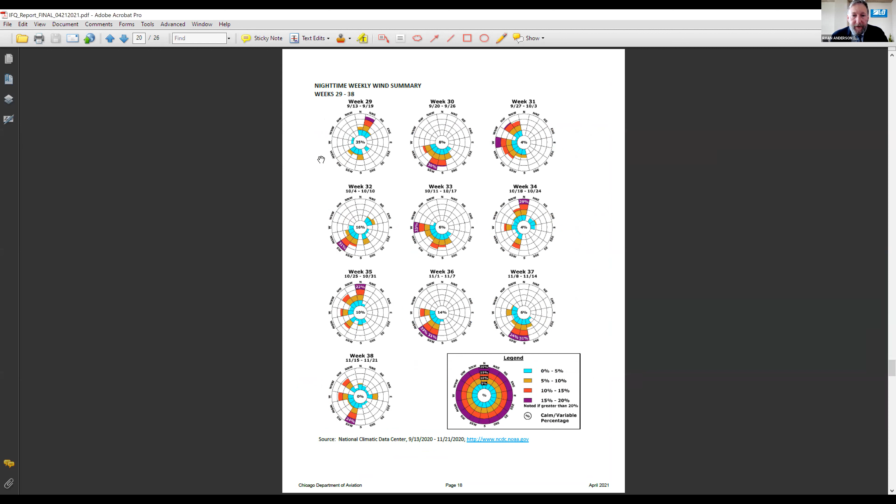the 48-week period. Starting on page 16 is that week-to-week wind rose summary, so you can go through and see what the winds were occurring on each week of IFQ throughout the 48-week period. Page 20 is our runways report for the entire IFQ period for Fly Quiet mode. So you'll see the utilization of runway percentages, as well as the average nightly departures and arrivals.

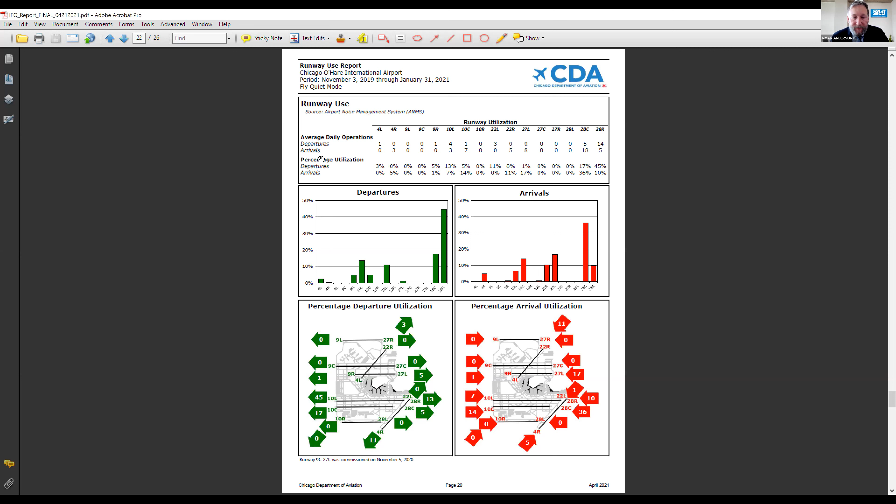You can see again, 28 right and 28 center were our primary runways for departures and arrivals, at least as far as utilization. And then the rest of the operations were able to be spread out. You can see on departures 4 left and 22 left, 3 and 11% respectively. And then on the arrivals, 22 right and 4 right, 11% and 5% respectively. But again, 28 center and 27 left did carry most of the load in west flow. And again, the airport was operating predominantly in west flow during IFQ, as shown by that wind diagram.

Page 21 is the airline summary report, page 21 and 22, where we list out all of the airlines that operated in Fly Quiet mode during IFQ, the number of departures and arrivals for each airline, whether they're a dedicated passenger or cargo operator. So we are looking at a total of 97 individual air carriers that operated during Fly Quiet mode during IFQ, with a total of 27,228 operations. Page 23 is our fleet mix report for Fly Quiet mode during IFQ. You can see again that average 82 operations per day during IFQ.

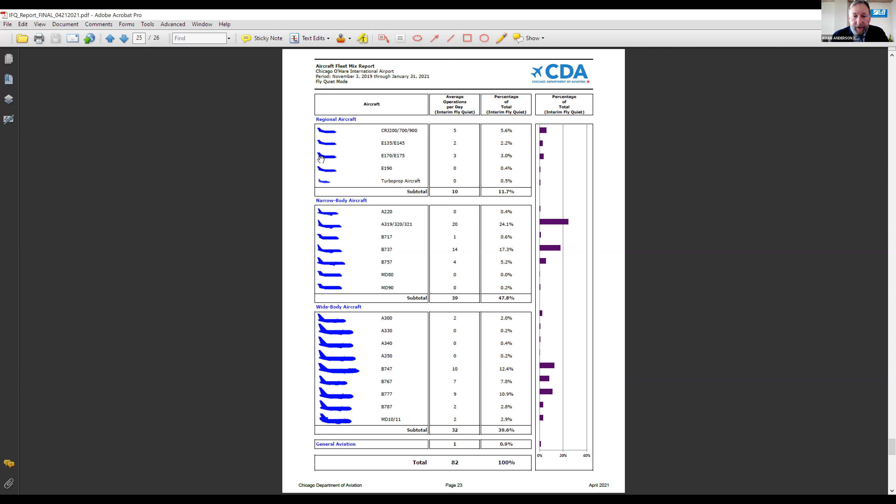A couple things to point out. You'll see wide body aircraft represented almost 40% of the operations in Fly Quiet mode. Narrow body was 47.8%, and regional aircraft just 11.7%. So although during the day we see that regional aircraft percentage be much higher and usually closer to 50% of the fleet mix, at night you'll see the narrow body and wide body aircraft are the aircraft types most predominantly used during the overnight hours, at least during IFQ. And that is the report for the interim Fly Quiet runway rotation program.

As I mentioned, we want you to take a look at this report and the data, and then let us know if you have any questions. And if you do have specific questions, maybe submit those through Jeanette before the next meeting, and we can prepare answers and responses if needed.

All right, thank you, Ryan. We have a couple questions here. Ernie, you're first. Ernie? If I put my hand up, Joe, I didn't mean to. I apologize. Oh, okay then.

Peter? Oh, yeah, Ryan. Can we go back to page 4 on the presentation there? You've got the reasons for not using the designated runways, the operational requirements was 27%. And that kind of lumps together safety inspections and aircraft requirements. Does that number include runway requests, specifically runway? Can we break that down further as to what percent of that is maintenance versus runway requests? Is that possible? Yeah, we can look at that and see if we can carve out specific long runway requests versus maintenance or other requirements. Yeah, I'd like to see that. Thanks.

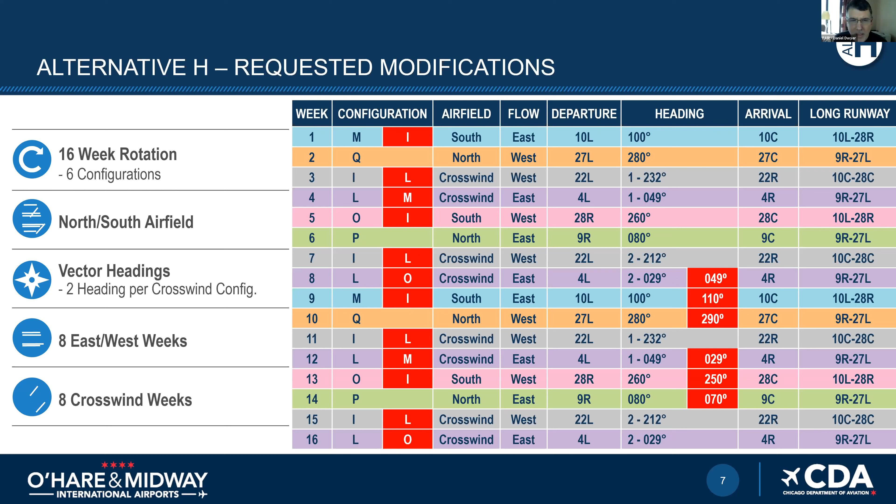Yeah, in addition to showing those departure headings, we would just ask that you still overlay the arrival corridors. We sort of fear we're forgetting about the arrivals and that some of these recommendations to change headings overlap arrival corridors, which, as we know from prior data, is 2/3 of the operations. So if there's an arrow for departures, just please show the arrival corridor as well. Thanks. Okay, all right, Dan. Ernie, you're next. Thank you, Joe.

Ryan, I just want to make sure I understand. What we see now in alternative B, and I'll go to weeks 4 and 5, P and O was just swapped with O and P. Do I understand that correctly? And that's true for weeks 10 and 11 too, right? Yes, that is the recommended or requested modification. I have not actually done that, so I want the committee to entertain that and discuss if that's what we want to do. But yes, it was the request to just swap P and O, change the iteration there in weeks 4 and 5 and 10 and 11.

All right, so 4 and 5 originally was O and P and now it's P and O, or is it the other way around? I just want to make sure I'm not confused. Yeah, it's the other way around. So originally it was week 4 configuration P. The request is that instead of week 4 configuration P, we do week 4 configuration O. Week 5 was originally configuration O. The request is instead of O, we do P. Yeah, thank you. Thank you, Chair.

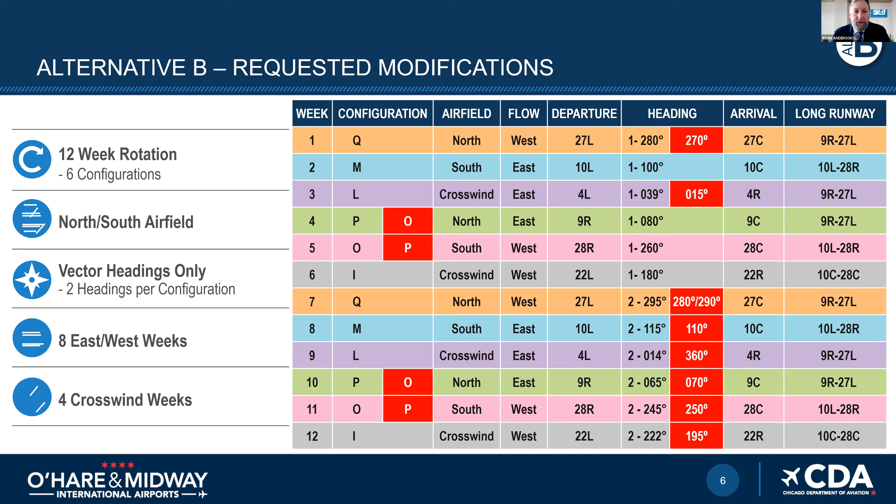So we're going to move on to alternative H, and similar representation of the requested modifications. Again, re-summarizing alternative H, it is a 16-week rotation versus alternative B, which was a 12-week rotation. It's the same 6 configurations, just rotated over 16 weeks as the crosswind weeks are doubled to 8 instead of 4.

Again, the same concept of the north-south airfield split where it alternates between north-south airfields and utilizing the crosswinds. Same concept as far as vector headings. The only difference between B and H as far as vector headings is that alternative H, at least in the initial alternative, only utilizes 2 headings for the crosswind configurations.

All of the east-west configurations incorporate a single departure vector heading. And again, 8 east-west weeks in the schedule paired with 8 crosswind weeks. So you'll see weeks 1 through 16, the original configurations assigned to each week.

And in this case, we received some significant requests for changes to this alternative, pretty much a reshuffling of the entire schedule. You can see outlined there as each week, except for weeks 2, 6, 10, and 14, have requested that we use different configurations.

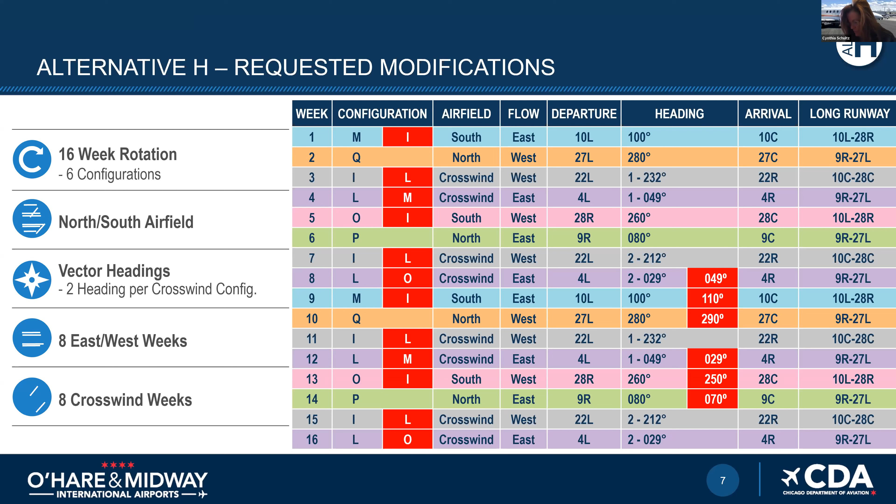Yes, the single heading concept that Karen mentioned for alternative H, we think that should also be considered for alternative B. And it's not necessarily just cutting the rotation in half, but picking the heading that least overlaps the arrival corridors for consideration. It's sort of built into what's illustrated here, but you can't necessarily assume it's a consecutive order, if that makes sense. Thanks. Okay, Mayor?

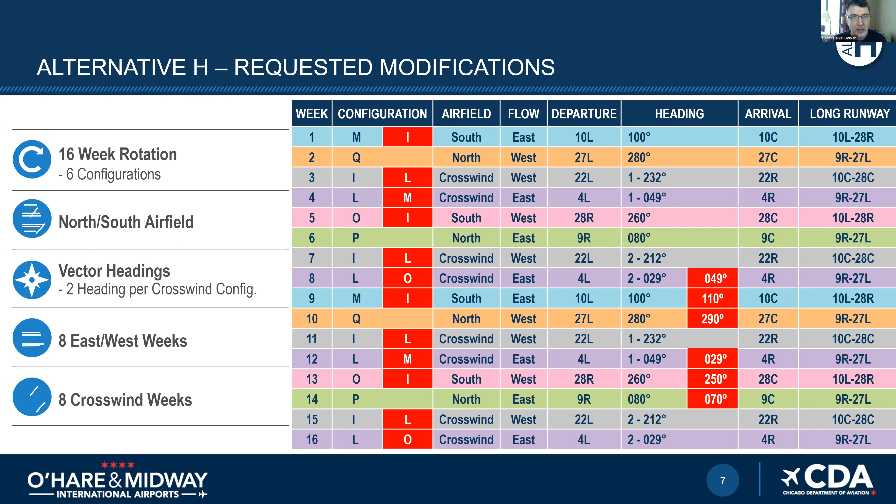Hi, can you hear me? Yes. Thank you. Due to the reshuffling of this, if I follow along, I'm still concerned, as Karen is, about the consecutive impacts. It looks to me that the designated long runways are duplicated every 2 weeks. So that's something maybe we can take a look at. Yeah, Mayor, I think the subsequent graphics that we can do to show all the specific changes here would help illustrate that for you. Exactly. Thank you. All right, if there's any more questions, Ryan, you can continue.

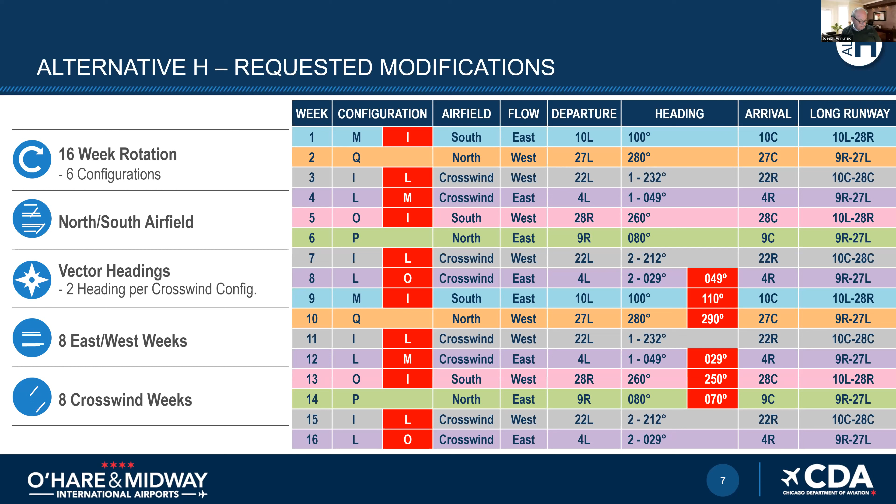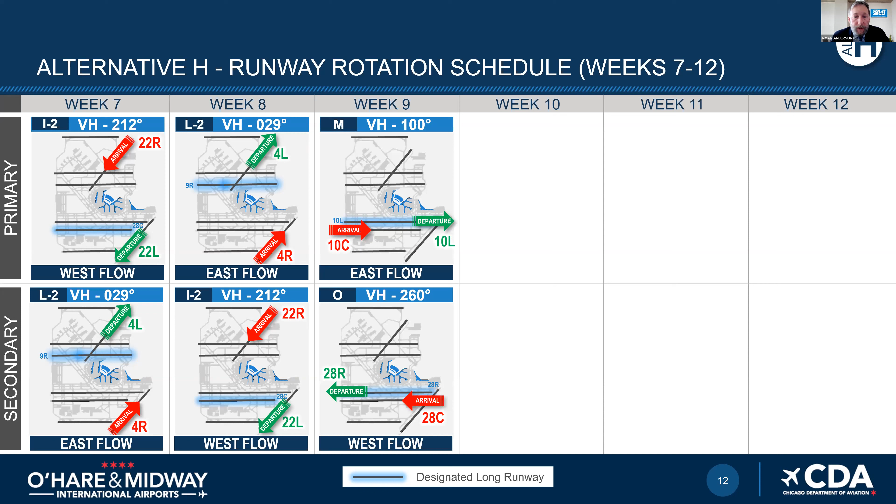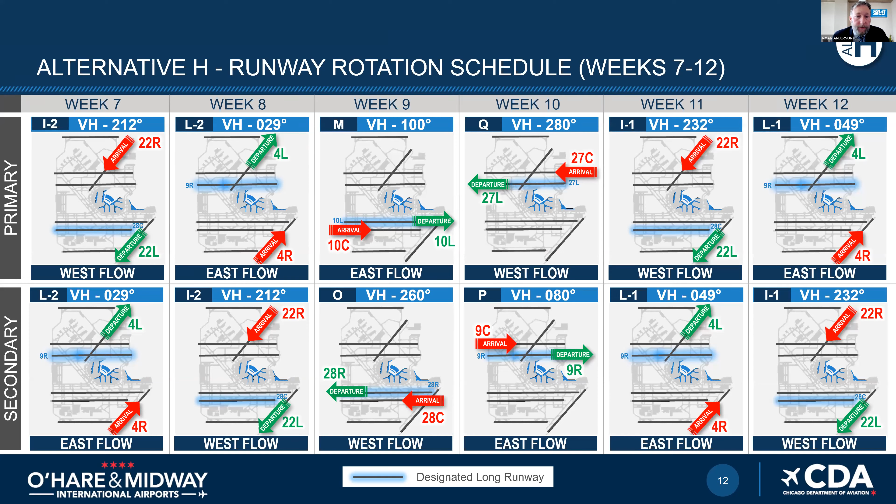And again, as originally scheduled, you'll see the crosswinds back to back and then parallel or east-west, east-west, north-south, crosswind, crosswind. And then we have our last slide where we complete the 16 weeks with the remaining 4 configurations paired with their secondary. And you can see, again, the ending with those crosswind runways back to back in the schedule, utilizing the second vector heading for the departure runways. So those are the graphics illustrating the primary configurations and alternatives B and H as originally scheduled, along with their paired secondary configurations that we would use in the event of wind conditions dictating that secondary east flow or west flow.

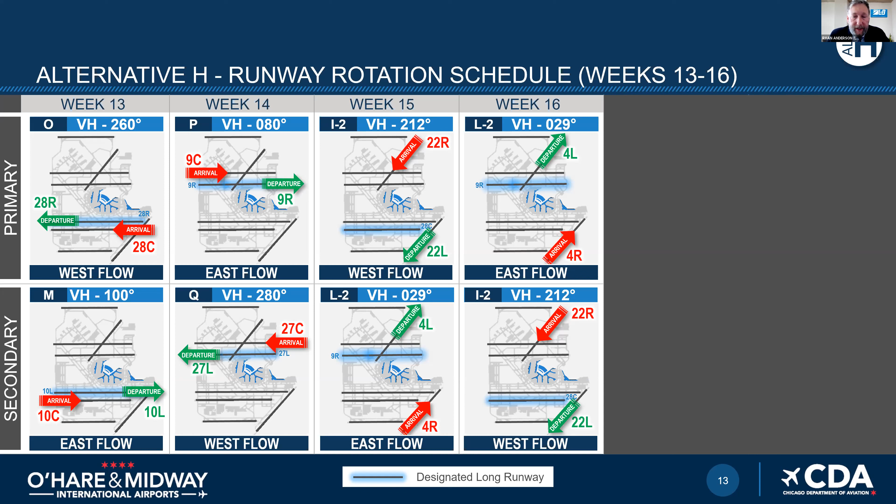All right. Looks like we have a couple questions. Jacob Hill. Oh, no, wait, I'm sorry. Not yet, not yet. Any questions from the committee? No? All right. We got quite a bit of information here that we're going to have to deal with.